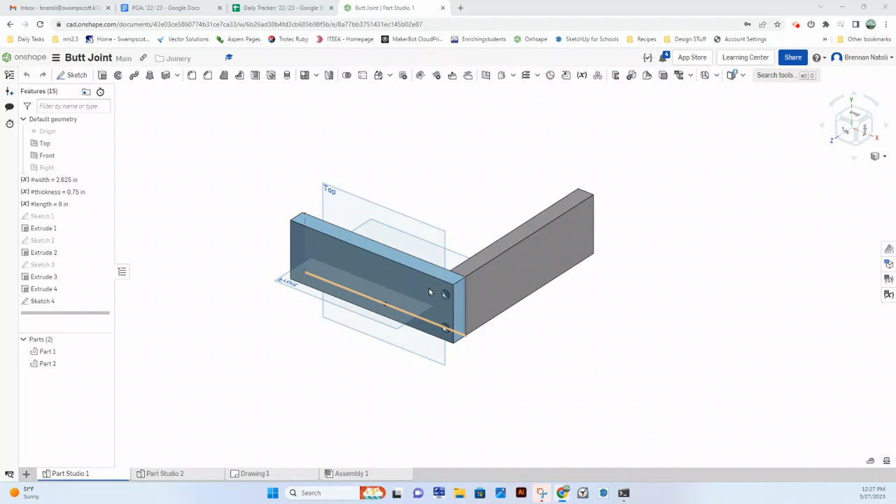So we're going to create a three-dimensional model of the butt joint here. Now we're going to go off of the dimensions that are outlined on the website. All right, so we have the 8 inches long by 2 and 5/8 inches tall by 3/4 inches thick. Okay, we're going to use those two pieces to create this joint here. So here's what we're going to draw.

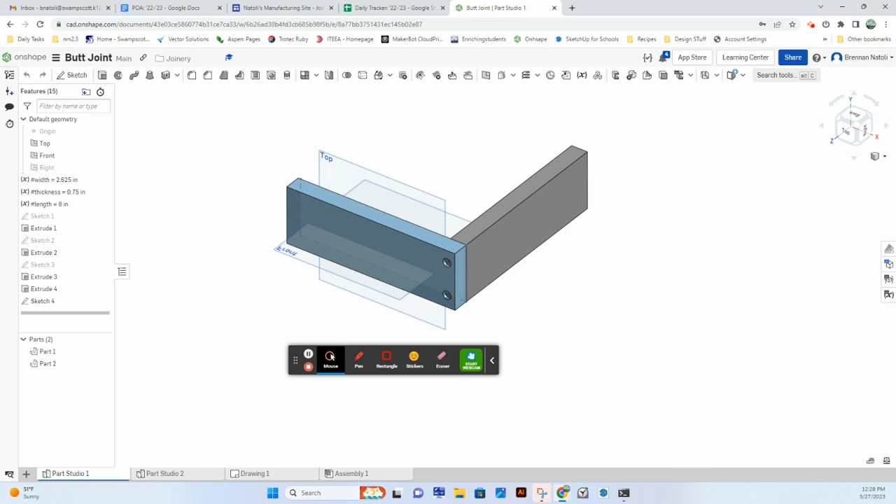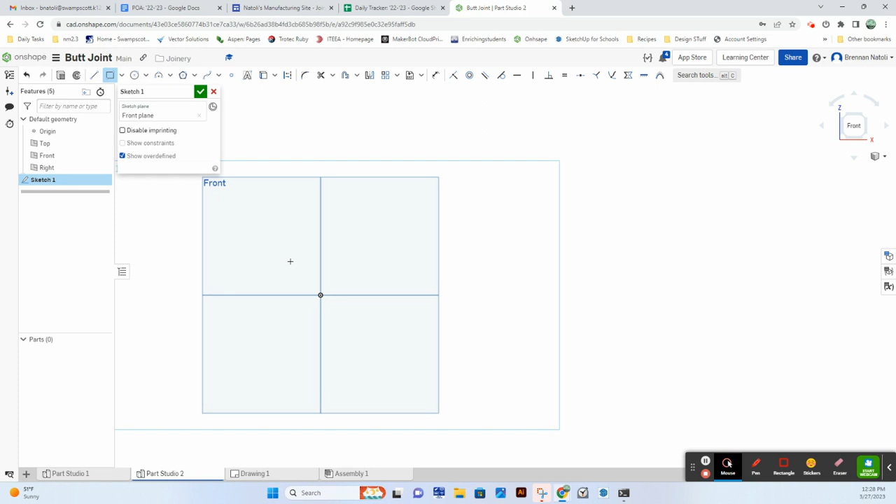Now the first thing we're going to do is we're going to create a new part studio. So I already created that. Now we're going to draw a quick sketch. We can do this a few different ways, but this is just one way of doing it. So I'm going to click sketch, choose the front plane. Now I could go line by line, but I'm going to just click corner rectangle and draw this from the center origin. So I'm going to click and drag, and I can dimension now or later. So I'm going to dimension now.

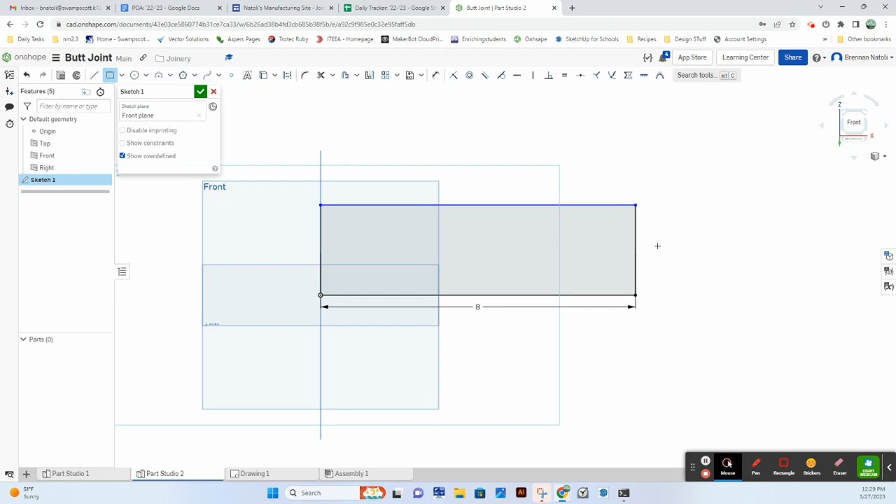So when I click once, you'll see this is open. I don't have to click anything in this dimension. The fact that it's white and has the numbers inside of it means that I can now type in a number, and it will allow me to put in 8, and then I could put in 2 and 5/8. Now, I can put fractions in here, but I know that 5/8 is 0.625 as a decimal, so I can just put 2.625, enter, and there is my side profile of one of the pieces of wood.

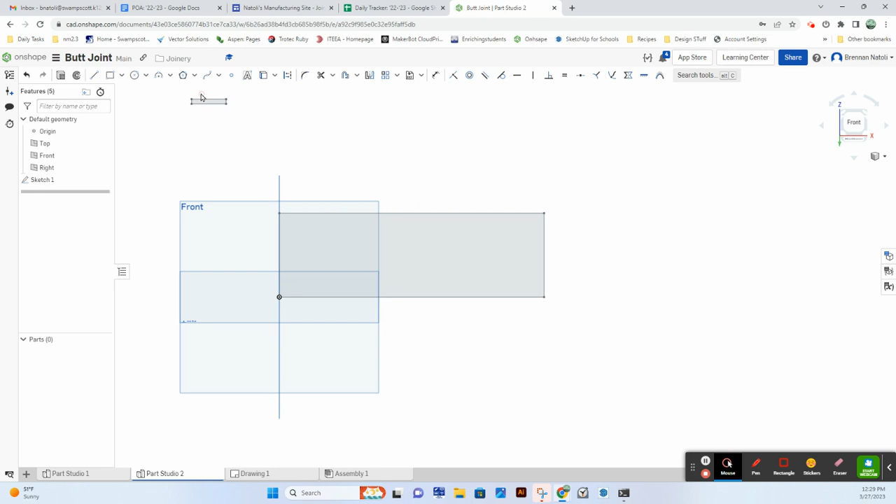Now I'm going to hit escape. And now if I want, I can just click and drag and move these dimension numbers out of the way. I'm going to title this sketch as piece 1, green check mark. Now I'm going to rotate. It's still just a two-dimensional piece. So what I need to do is get rid of, I have an extra piece up here. I'm just going to get rid of this.

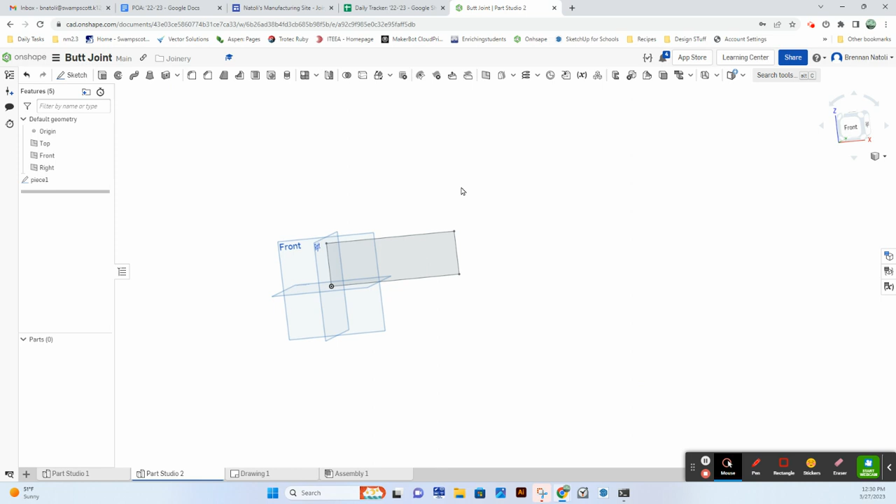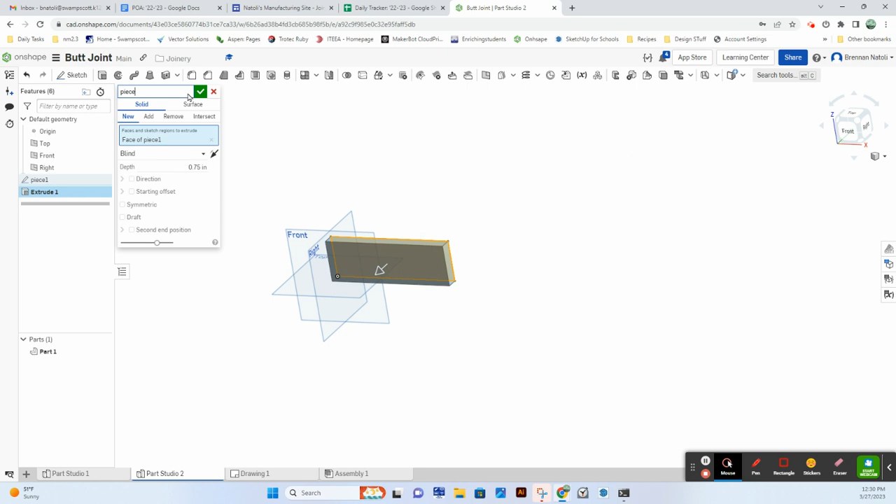So what we need to do is extrude this. So we're going to click the extrude command or shift E and extrude this 3/4 of an inch. So I can type in here where it says depth 0.75, or I could type in 3/4 of an inch. Okay, this is a new part. I'm going to title this extrusion piece 1, green check mark. So now we have one block of wood. So if I'm looking back to my original model, we have this piece here, part 1.

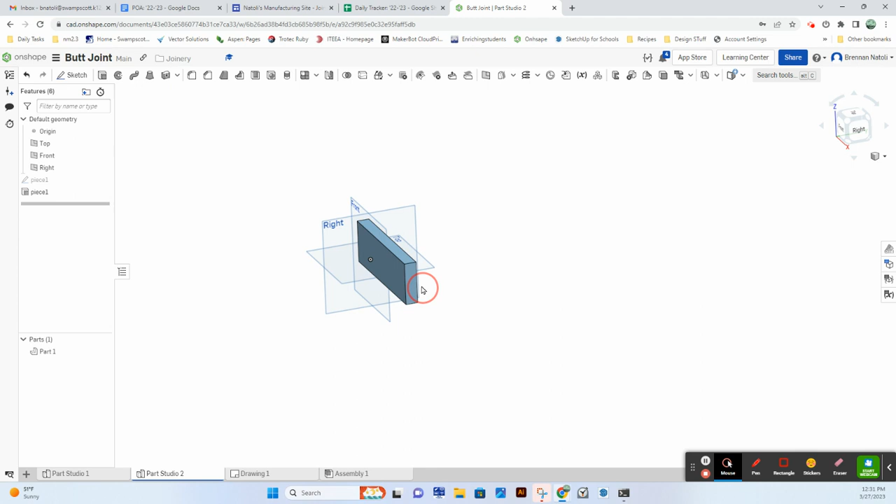So the next thing I'm going to do, I'm going to draw this connector. We're going to draw this as it is assembled. So I can do this a few different ways. I'm going to come over to this, I'm going to rotate it around. So I'm looking at this side, the right side, but I'm going to start my drawing on the face of the end here. So I click this face, and click sketch. Now I'm going to click the right side on the view cube or N on the keyboard, which orients my view a little differently.

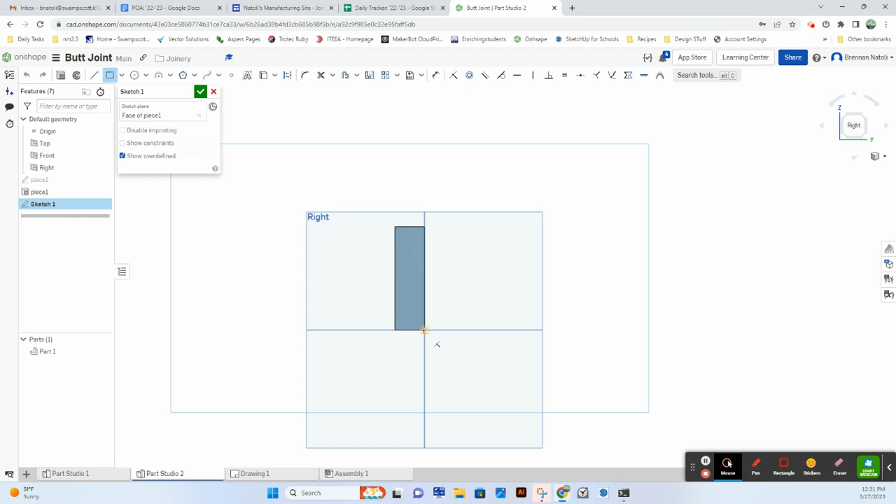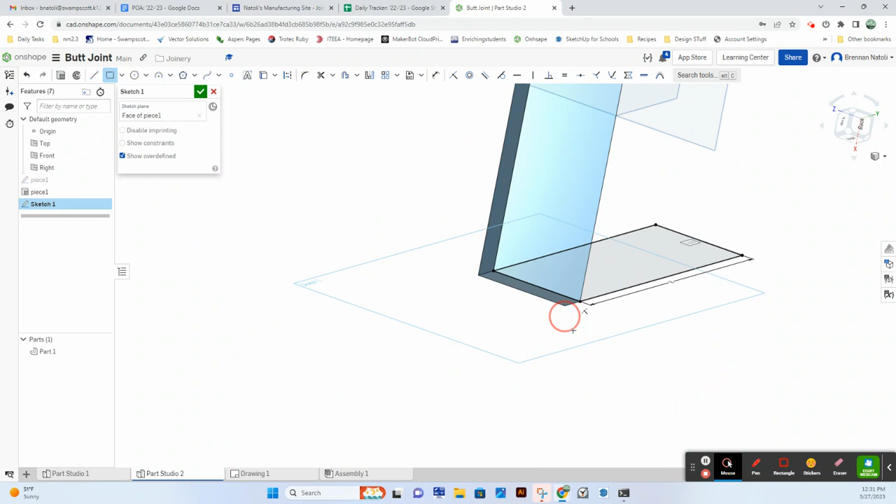And now what I'm going to do is draw that same rectangle, corner rectangle, and I'm going to draw it from either the bottom or the top corner of this piece. So I'm going to click drag, and I already lined it up with this, so it's already 2.625 height, and I'm going to define the length as 8 inches. Now we have this sketch, as you can see here, still 2D. I'm going to name this sketch as piece 2.

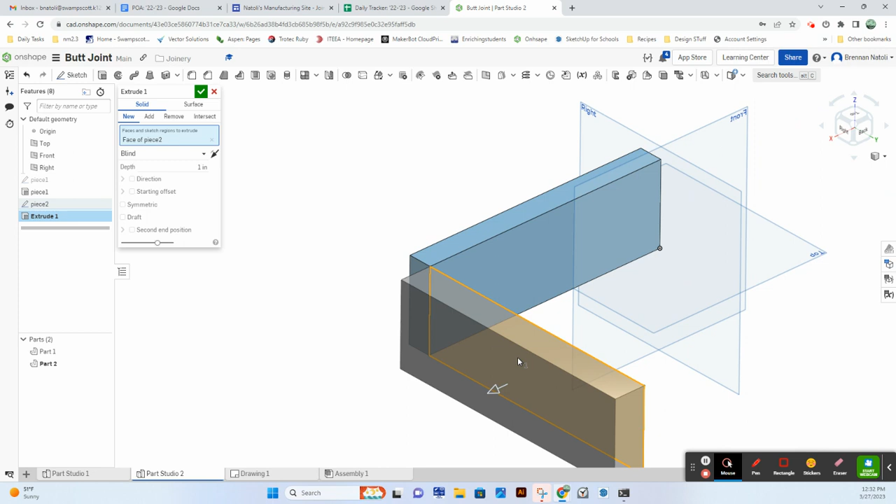Now I need to extrude it just like I did before. I'm going to extrude this. Click the extrude command, click the face I want to extrude, and make sure I'm extruding in the right direction, right? I want this to butt up against this piece. So I want to reverse the direction and change the depth to 0.75. This is a new part, and I'm going to title this extrusion piece 2.

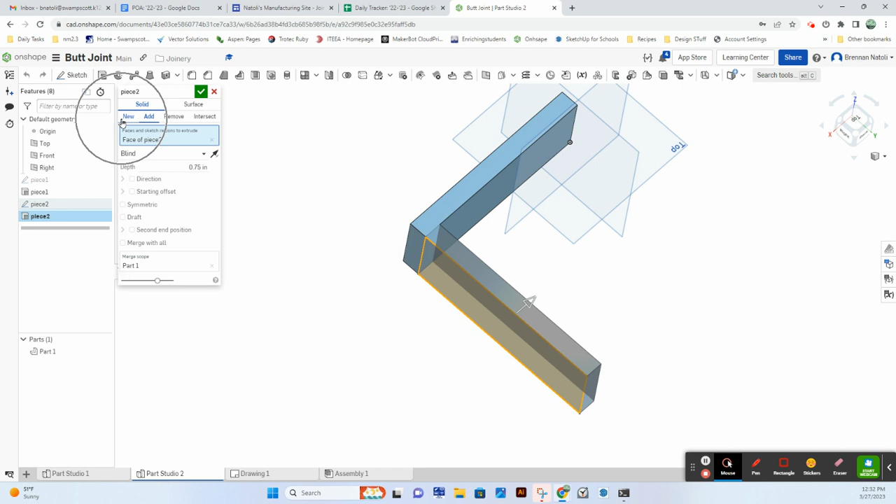Oops. Make sure you don't click add. Make sure you click new when you create the extrusion. It's a new part. And we now have our part 1 and our part 2. And we have created the butt joint. So almost there. What we need to do now is we have these 2 holes here. So we have to do a little bit of dimensioning out, but this is pretty straightforward.

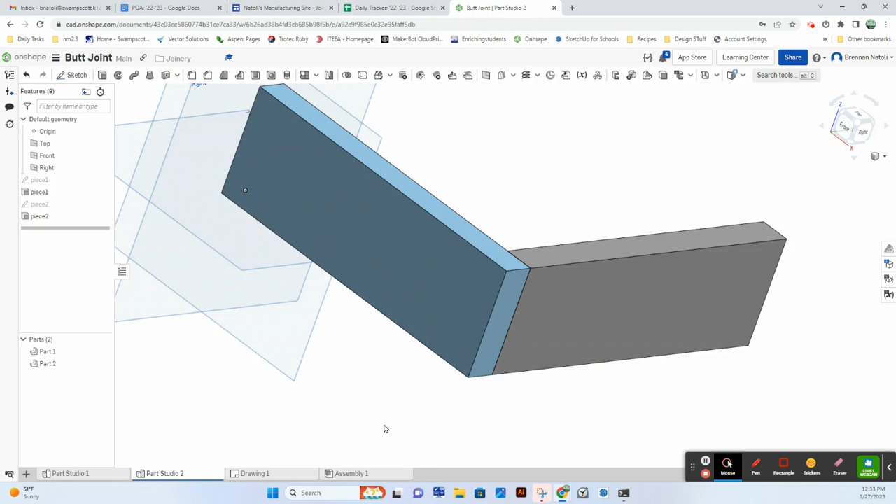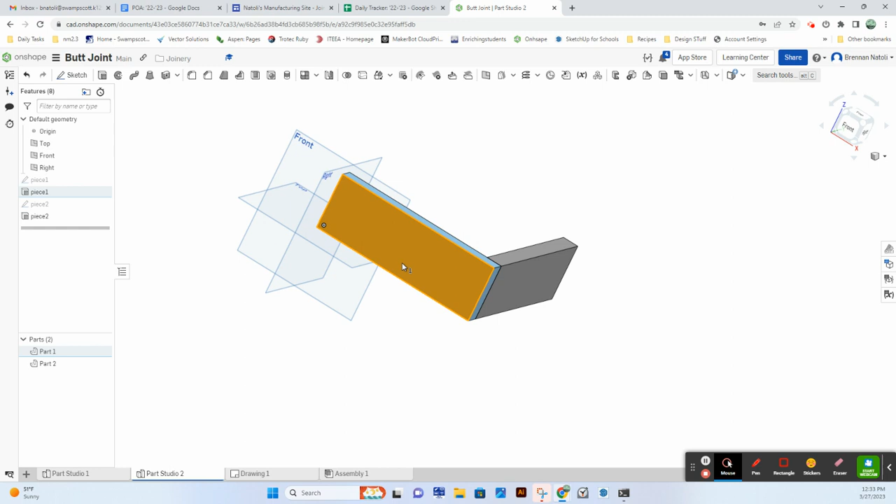So if you look at your part drawings, we can line up both holes. So we have a hole that is 3/8 inch from the end and is 9/16 from the top. So what we're going to do is create a sketch on this face here. So I click this face, click the front view cube or N on my keyboard so I'm looking directly on it, and we're going to create a new sketch. Okay. From here, we're going to create a circle, and the diameter of that circle isn't important right now. Just on this face, draw one circle.

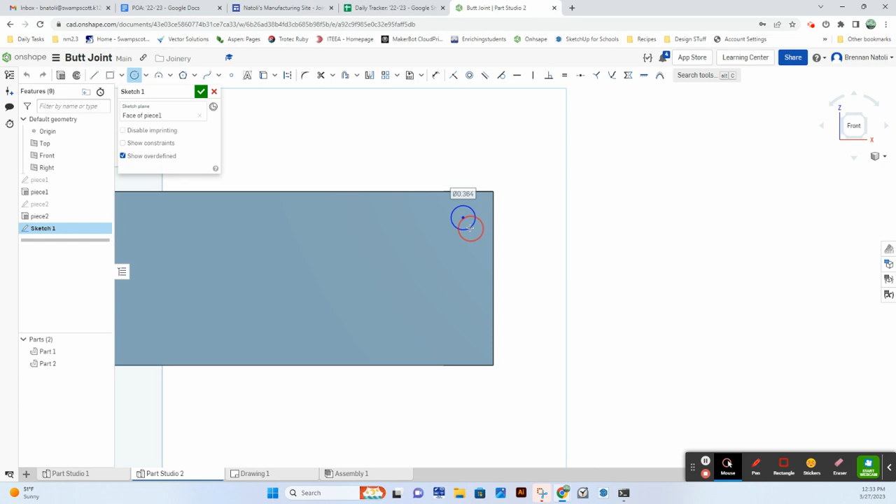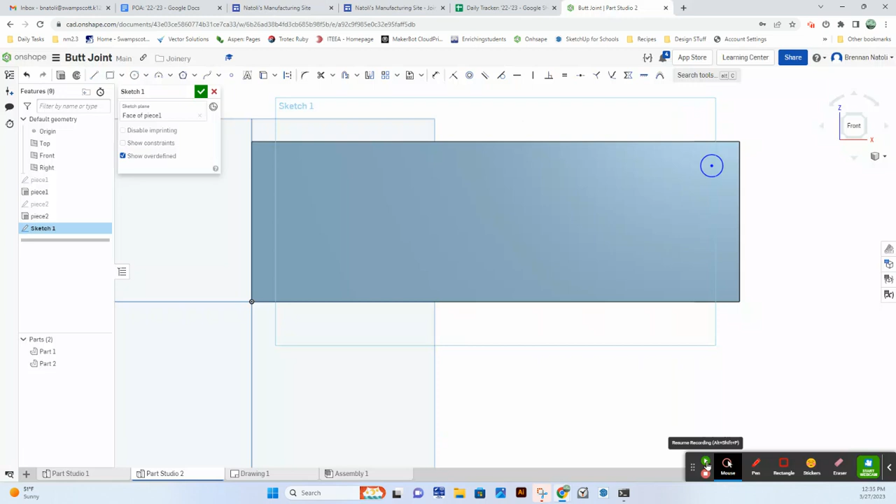And what we're going to do is, if we look at our piece, the dimension of this, did I give us a dimension? It doesn't look like I did. Let's give it the dimension. So we will give this hole the dimension. I just changed it. So I click the dimension tool, click the circle itself, the outside, and we'll give this a dimension of 3/8. So 3/8 is a dimension.

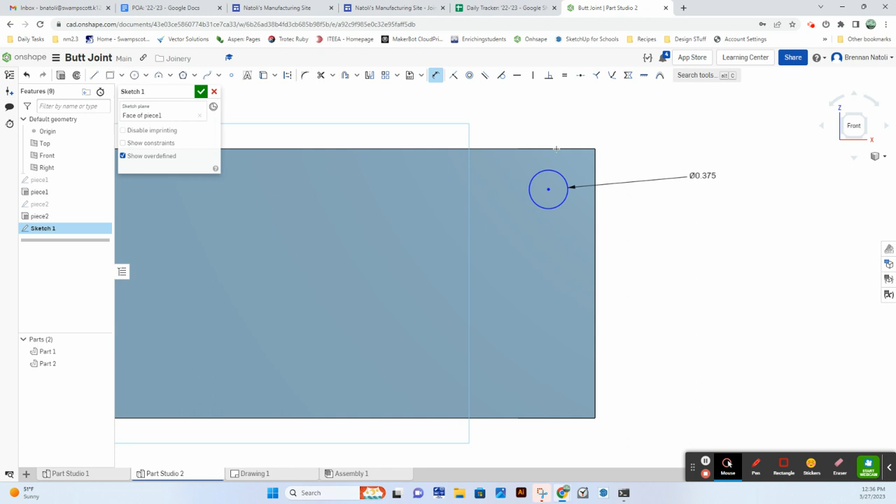Now, if we look at the project plans itself, we can see that it is 9/16 from the top, from the top of the piece down to the center of the circle. So we go back to the piece here, click the dimension tool, click the top line, click the center of the circle, and type in 3/8. So just check that. Sorry, I reversed that. It's 3/8 from the side. This is going to be 9/16.

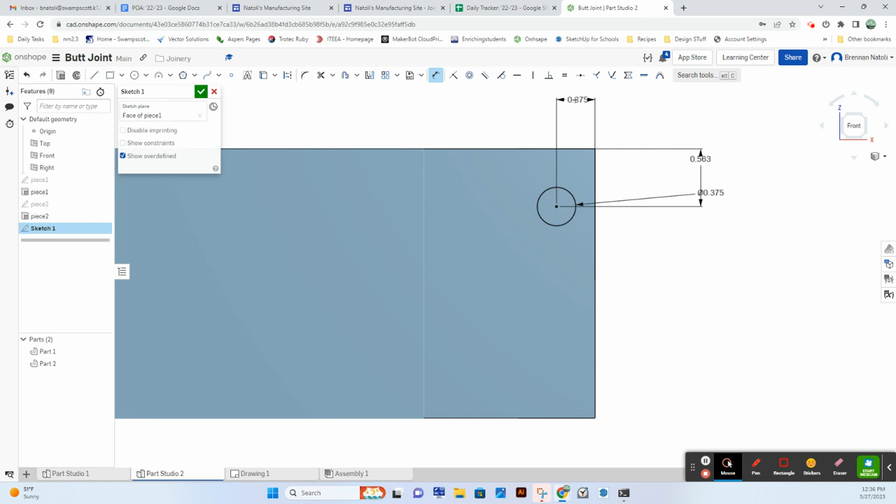Here we go. On the top there, it's going to be dimension from this end to here. That's going to be 3/8. We have a lot of numbers here. So it's 9/16 from the top to the center and 3/8 or 0.375 from the side to the center circle.

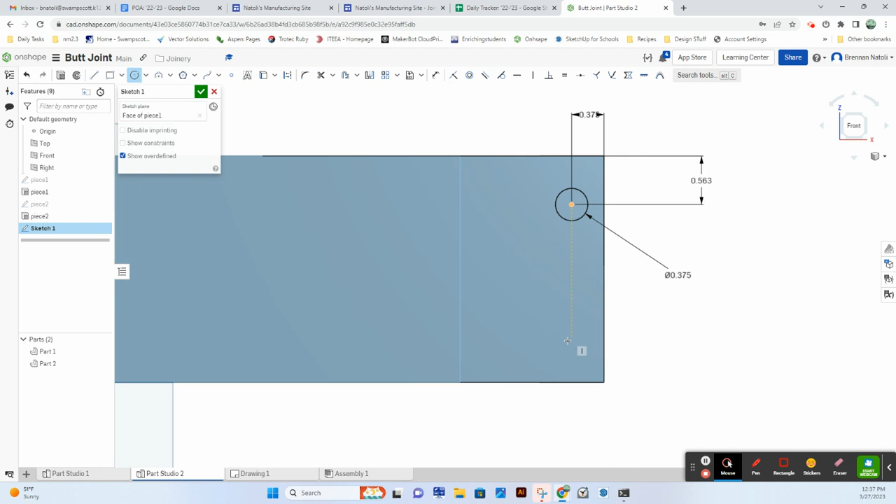Now I could draw the next circle using the mirror tool, but it's good practice, so we'll draw the same thing. So I'm going to take the circle tool again. Now if I hover over this last circle, don't click anything, just hover over it, I can stay in line with that on that plane. And I'm going to click drag, dimension this at 3/8 of an inch. The circle itself is 3/8 of an inch.

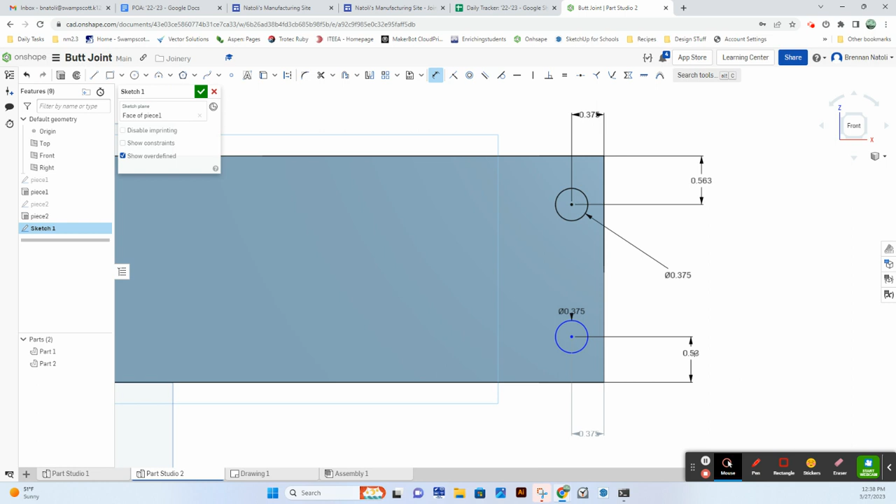Now I'm going to dimension the distance from this center to here, 0.375. And the distance from the circle to the edge is going to be 9/16. And I will change this sketch name to countersink, and click the green check mark. So we have our sketches there. We still have to extrude these.

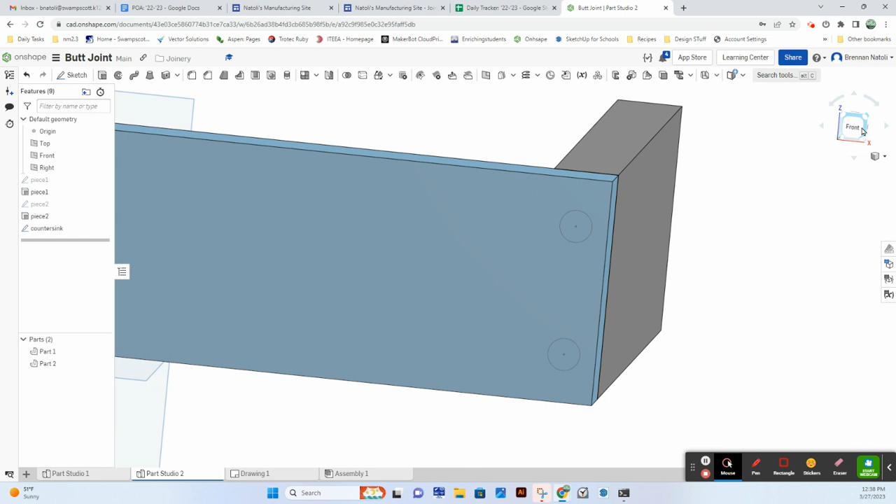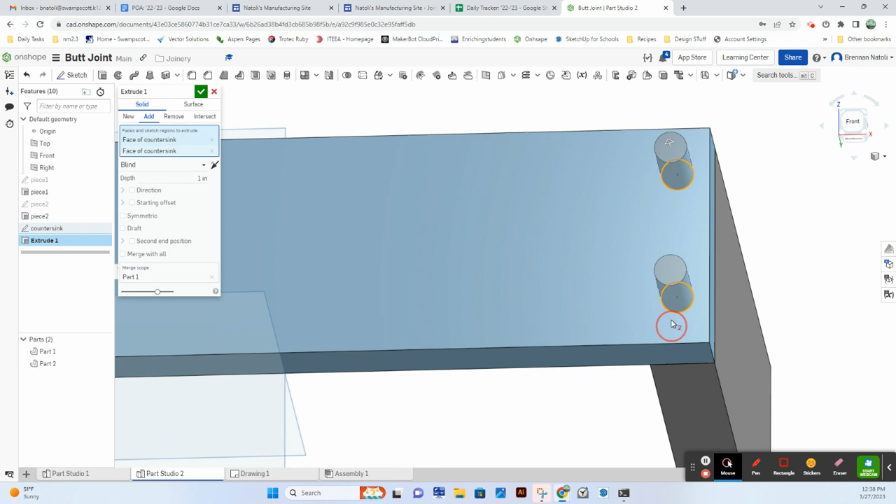All right, so if we go back to our drawings, the depth of that extrusion is 1/8 of an inch. So let's click the extrude tool. Now we're going to click both those circles, and we're going to change it from add to remove over in the command box.

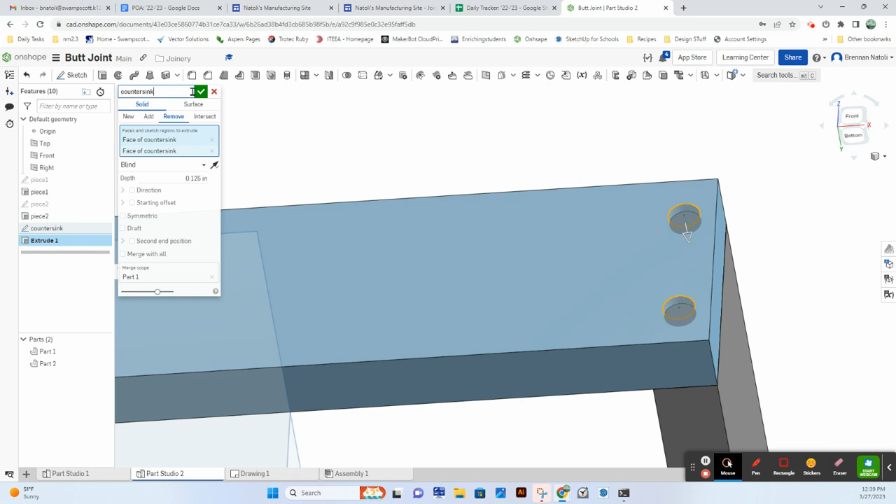And again, looking at our drawings, we want this to be 1/8 of an inch down. So we're drilling out this piece here. So in the depth, I'm going to type in 1/8. Change this extrusion name, I'm going to type in countersink. Okay. So we now have our countersink extruded on our butt joint. We have to now just add the pilot holes.

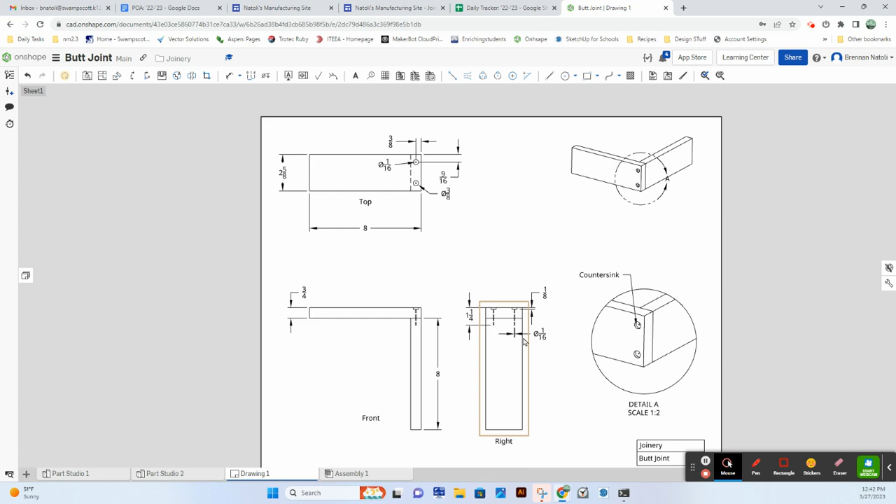So if we look back at our drawing, we have our pilot holes. Those are the longer holes that we pre-drill through one piece into the other for the screws. It has a pilot to guide the screw so it doesn't split the wood that we're drilling into. So this is 1.25 inches deep from the top, and it's 1/16 of an inch thick.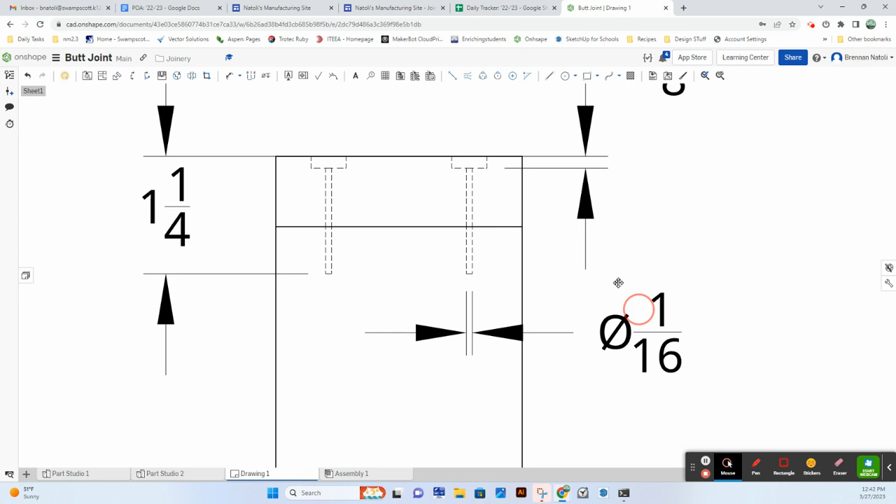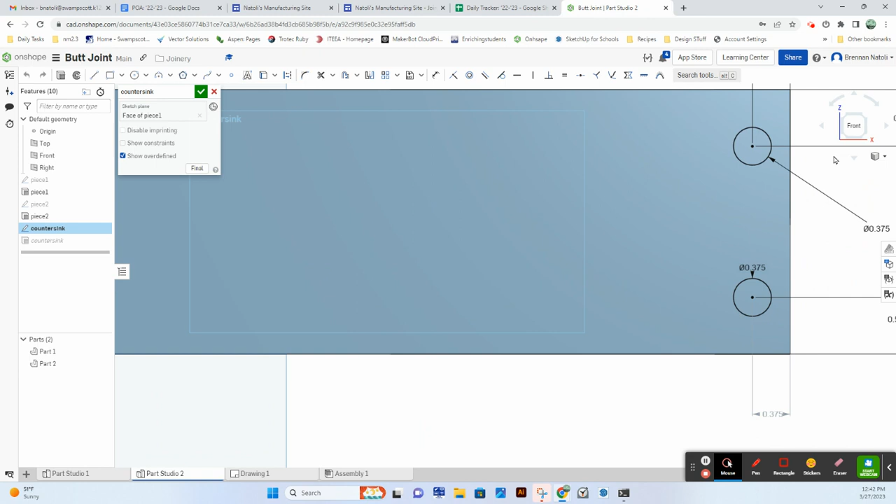So I'm going to go back to the model. And this is in the center. I can create a new sketch, but what I typically do is, you can create a sketch on this plane, or if I go to my countersink sketch here, I can use this sketch. So what I'm going to do is double click the countersink sketch and draw 2 new circles.

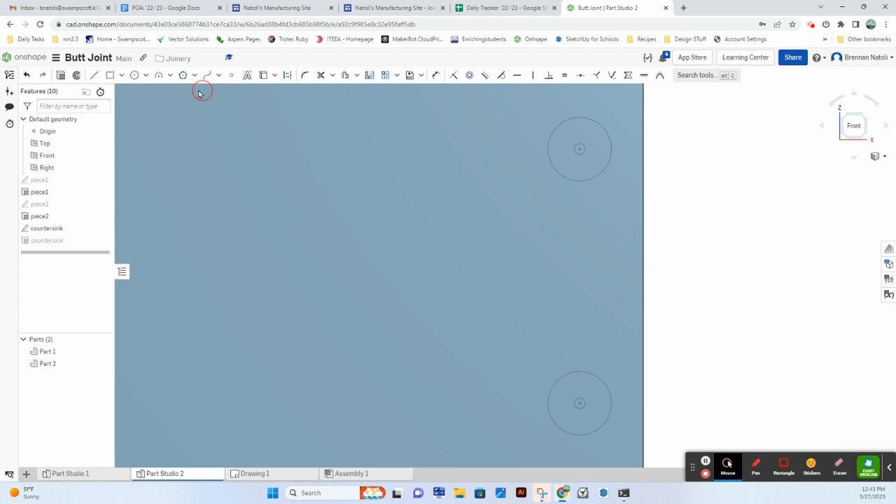So I'm going to draw one circle here, that's 1/16 thick. I'm going to do the same thing on the bottom, 1/16 inches thick. Great. Now, accept that, and you'll notice it won't be extruded, so this will be sticking up. So what I'm going to do now is click the extrude command, click the top of those small circles we just drew, reverse the direction.

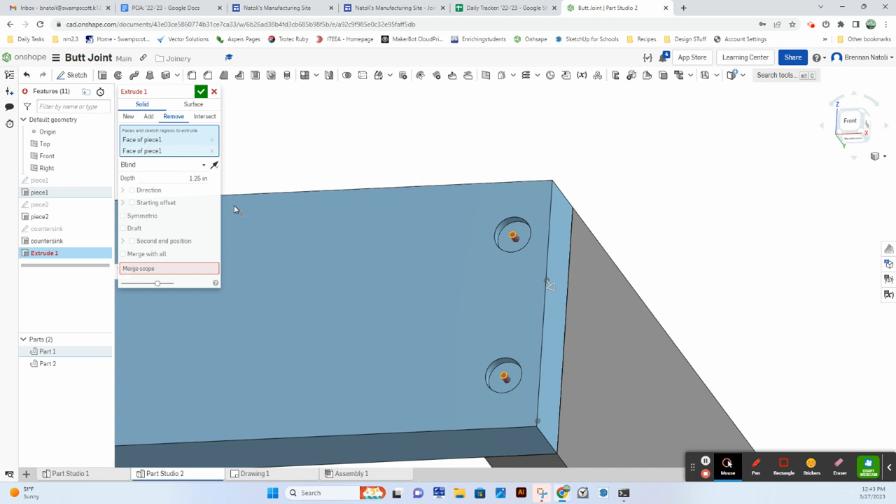We're not adding, we're going to remove. The depth is going to be 1.25 inches. You can write these as fractions, and it should allow you to. In the merge scope, this box here where my cursor is blinking, that's asking what are you going to remove from. You are going to click that box, it'll be blue, and you're going to select part 1 and part 2 because you're removing material from both of those.

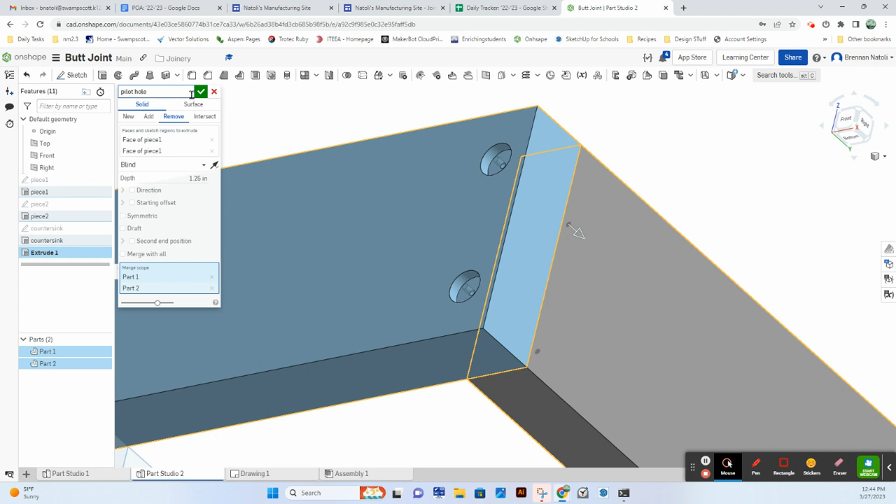I'm going to change this extrusion and call this pilot hole, and the green check mark. So now, if you look at this, we have our part 1, part 2, and we have our countersink with the 2 pilot holes. So I created the joinery here. That is a modeled butt joint.

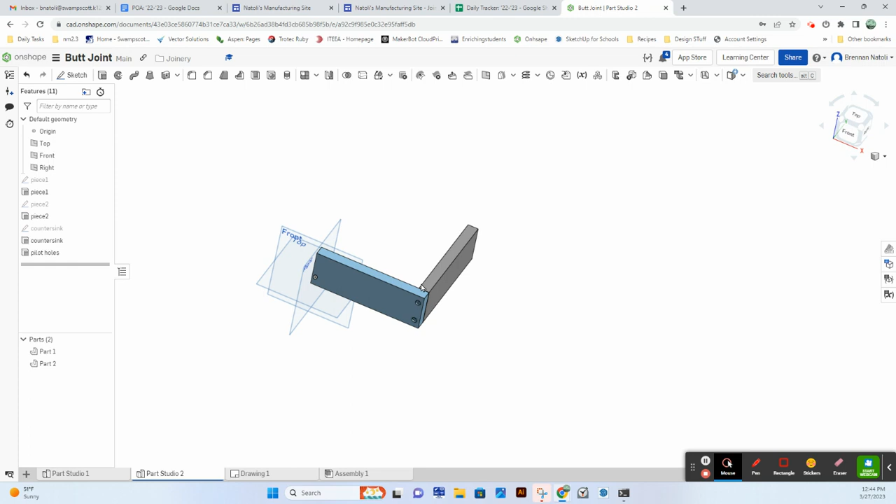So your drawing should have your parts labeled part 1, 2. You should have all of your sketches and extrusions: piece 1 sketch and extrusion, piece 2 sketch and extrusion, countersink sketch and extrusion, and your pilot holes will either just be an extrusion or they will have their own sketch depending on how you modeled it. All right, I'll create another video about how to create a drawing for this.